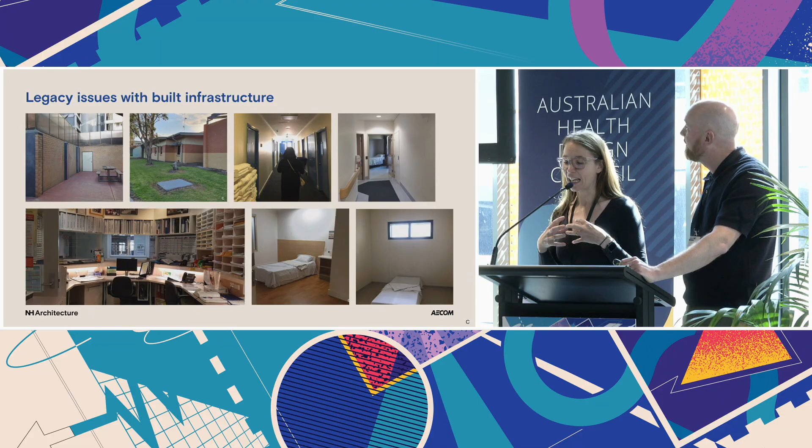Absolutely. So this is going to be quite awkward, isn't it? We'll work through this. We'll dance.

So the project itself was the first of future waves, and it was originally going to be the first urban wave with one regional hospital. So it was Royal Melbourne Hospital in the city, Northern Hospital in Epping, Sunshine Hospital in Sunshine, and the McKellar Centre in Geelong for Barwon Health. And really, this was the first wave of getting those immediate beds that were needed for the largest populations.

But as Codey talked about, what we were most interested in was firstly distilling down the key focuses for that work within the workshopping we did, which was obviously that it needed to be co-designed alongside people with lived experience. It needed to destigmatise the idea of mental health services, both in where the buildings would be sited, how they'd be positioned, how they could be perceived and what they were built out of. There needed to be good access to light. These needed to be spaces that weren't institutionalised. They need to be incredibly spatially legible and, of course, familiar and domestic. And when we started this, we didn't know what we meant by that.

And I always struggle to talk about how profoundly, personally life-changing this project was, and I don't know, Nick, if you felt it too. But designing really extensively as a co-design service with over 300 individual stakeholders week in, week out over a really long program, it changed the way we practice. We had to be really diligent about genuinely co-designing. We had to change the way that we demonstrated that feedback was taken on board and listened to, and we had to think really carefully about our language and how to be inclusive in what could be a really trauma-filled experience for people who had a lived experience of mental health, in a design process where we're talking about a really wide range of both really positive issues that we can influence and things that need to be considered from health and safety perspectives. So it was a challenging but thoroughly rewarding experience.

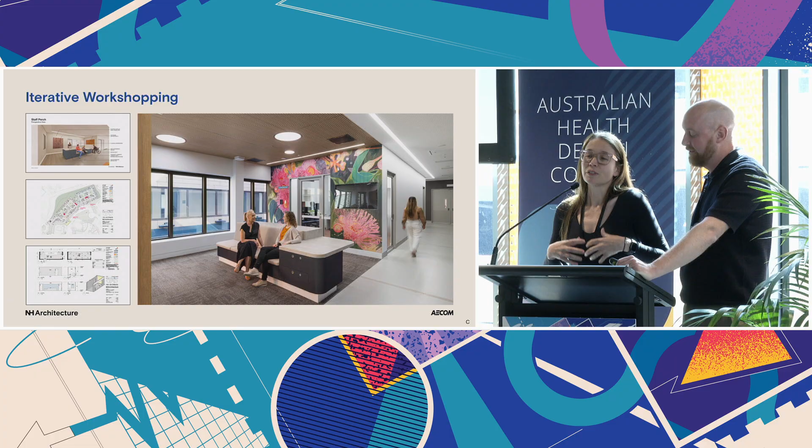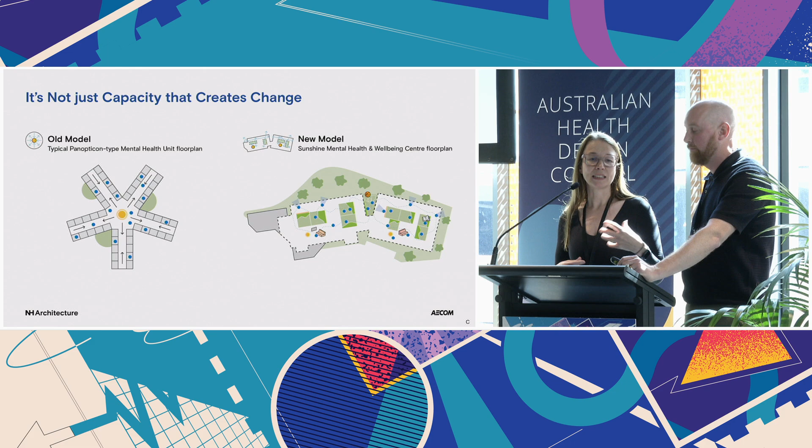We used iterative workshopping, which is not unusual, but perhaps slightly different in the way we had to frame it and capture it. We had to demonstrate improvement, and how it changed what we did from a panopticon model to something that was much more permissible and flexible and really did meet the needs across a range of stakeholders. We did prototyping, real life: come and feel the space, fill in surveys for us, collect it, touch it, feel it.

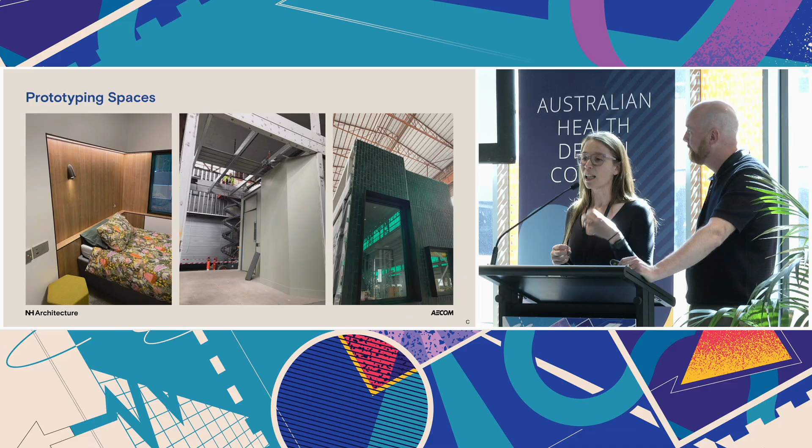I'll speak back to this slide in due course because we used modern methods of construction and standardisation, so this really gave us an opportunity to test elements before we rolled it out across many sites, many times. And of course, building projections so that people could walk around and understand the building.

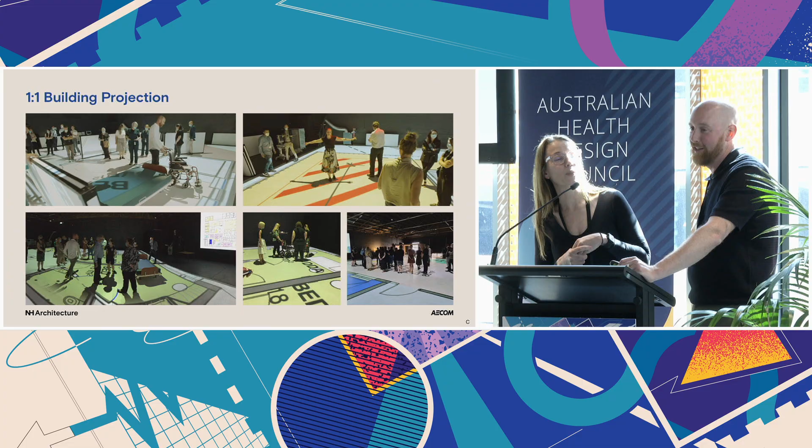I think we did this in the height of summer, Nick. I think 40 degrees or something. We spent almost a week there with close to 300 people, and it was pretty extensive. Although my favourite experience is we were there and we'd say, all right, everybody, get in the lift with us. And everybody, even though there's no walls, no anything, they'd cram into the lift and the floor would magically take us up to level 3 and we'd be able to look out and understand how the building worked.

And one of the great things about that, sort of the idea of being in all this process, was that the design outcomes are incredibly integrated. So you can't pinpoint a single thing. You walk into a space like this image here, and there's many elements that come together to make what the space is. There's the views through the courtyard, through the bedrooms, or the view out.

There's the way the service is being done across the desks. There's the way that the lounge system's working next to an ADL kitchen. These are all things that came through many conversations that made the space the way that it is now, rather than a single person with a pen on a paper trying to work it out.

We started to think about what is design familiarity and safety. What does that mean to people? What is welcoming? We still need to meet the health standards, we still need to meet the anti-ligature, we still need to meet the robustness. So how do you start to put those in a box and say those are secure things we need to do? But how do you then start to change the paradigm?

Is it about the timber? Is it about a view? Is it about the way that artwork is integrated? Those kind of elements were the conversations we could have. Equally, it's like, how do you see your 24-hour day existing? Yes, you're there for healthcare, but you're also there to recuperate. So what will you do with your time?

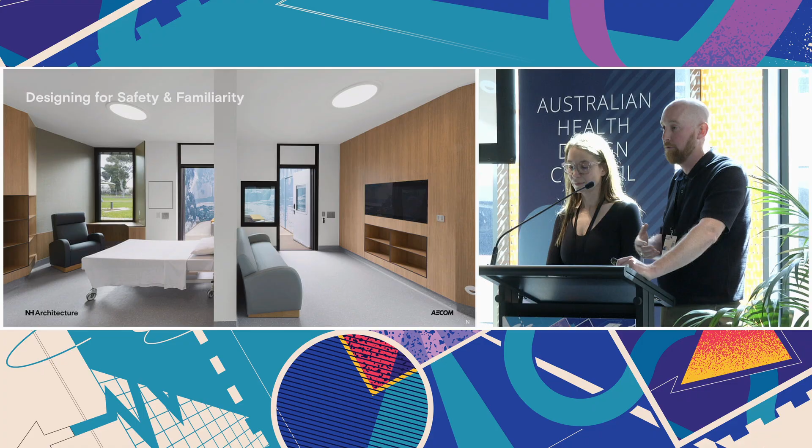Do you want to sit in a window? Do you want to have a view out? Would you like to have a space that's separate from the bed? Do you want to make sure you can't see your bathroom? Those are the questions and things we were discussing.

Equally, we were talking about, how is it to receive care? Is it to get rid of the us and them from consumer and clinicians? The idea that coming together around a desk on either side, you still have all the things you need from both parties, but you're actually working together on the problem.

It's something we brought up, these collaboration hubs, and I went just recently to Sunshine Hospital and saw them in action. It makes me so happy. I called my wife on the phone and said, this is the best thing we've ever done.

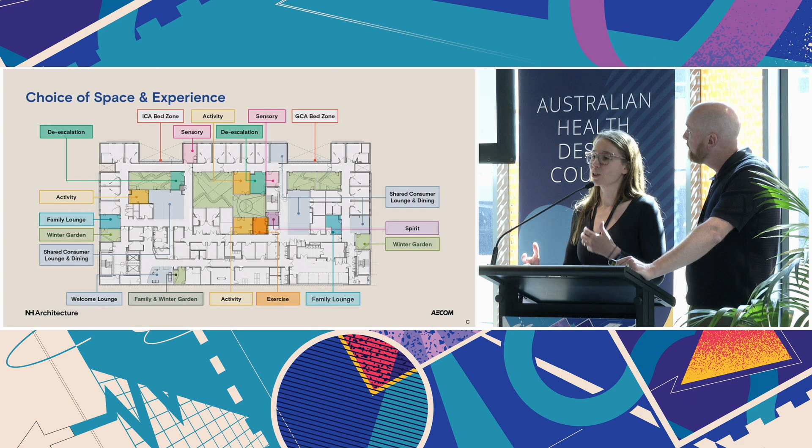And look, there's a huge amount of choice in these buildings, and I think what's really interesting is these were developed out of extensive co-design conversations, and it was really about a building that needed to be all things to all people, right? It wasn't acceptable for it to be enough for the majority. It needed to try and do a lot of different elements, and in my mind, it almost became a bit of a TARDIS.

We'll talk about it in a minute because I think that we need to think a little bit critically about what we did and whether or not it was required and how far we actually moved from a base case which was so underperforming to a case that potentially overperforms in some areas, and sort of that almost snap back of a rubber band in terms of how spaces are utilised and how people are now actually using the building and what we might think differently in future facilities.

Yeah, we'll get to that bit quite quickly, but I think it's important to remember one of the key things, along with having all the different bits of spaces, what was most important is that nearly all spaces need to be connected to the environment. And there's obviously environment as in the sky, the outside, but it's also more things like where you came from, how you got into a building, how you got there, where you're in relation to your home, where's the car park, where's the things.

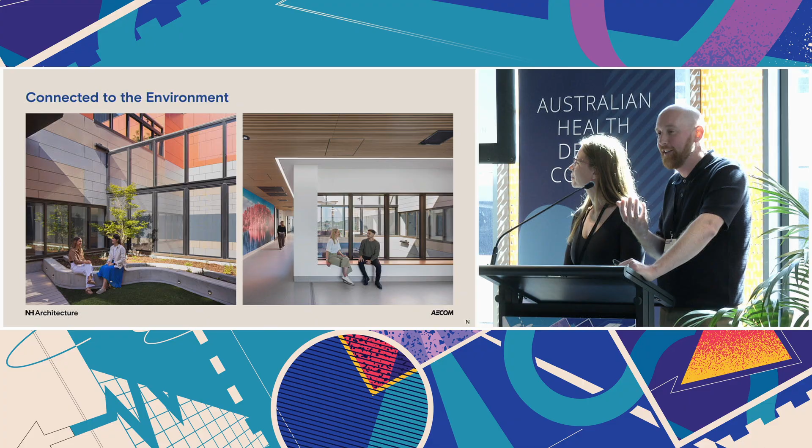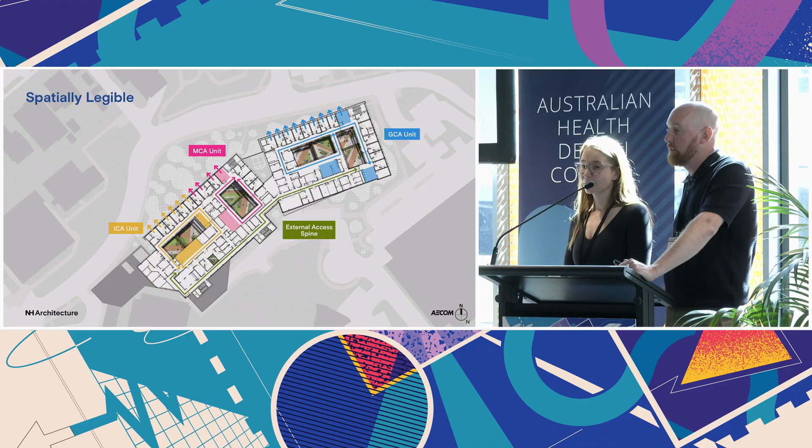The idea about really understanding being fully connected, not being institutionalised inside a giant TARDIS, actually, that was really important. And that really became about this idea around being spatially legible. So legibility extends past the idea of just understanding where you are in a building, which was important, but it's also understanding how did I get to where I am? What level am I? Where is my bedroom in relation to where I am right now? What's my journey look like through the day through this place?

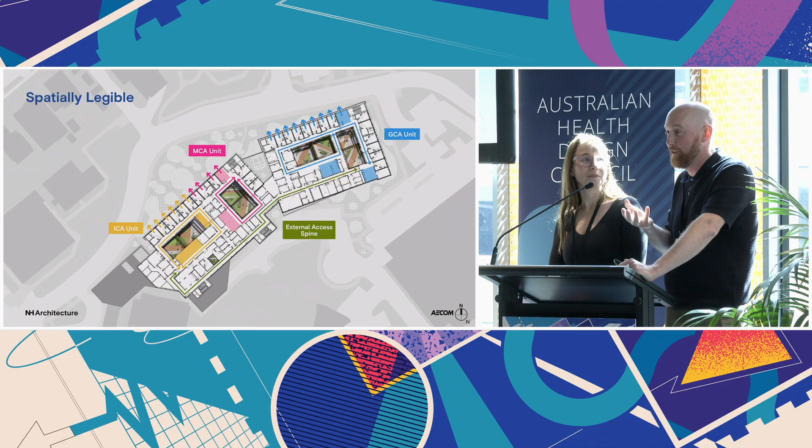And that became really important to how we actually understood the buildings, but also how we destigmatised them as large institutional health architecture. The idea that from your bedroom you can see everyone parking the cars in Epping Plaza all day and watching them play Skittles with each other is kind of fun and also very grounding.

And what came out as a result of that was the idea that the buildings really became building as boundary, which actually had another great benefit, was both that they became these buildings that just looked like part of the fabric of a campus. There wasn't large fencing around them. There wasn't the idea of institutionalisation of that.

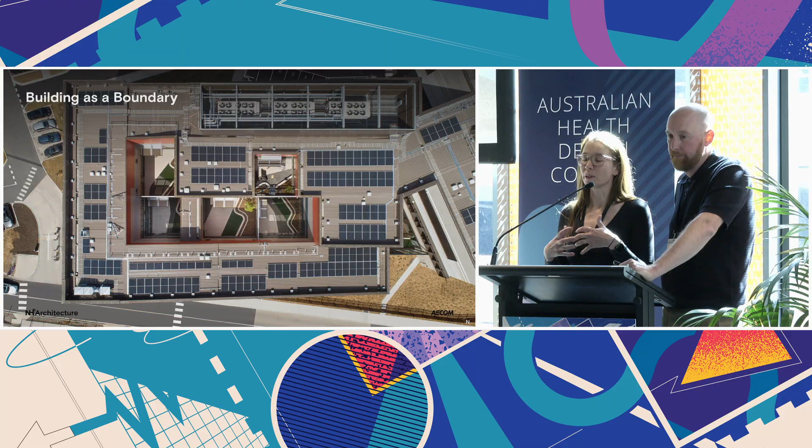Equally, within the building, there was very little need for many containment boundaries that were visible, because in a sense they became about a tall balustrade to an outside courtyard rather than the idea of a security device. And it really supported that co-design process where people had said one of the things that was just such a negative experience is fences and that sense of being contained.

One of the challenges of design for that is, as you might imagine, that when you start thinking about that, you've got to look at the solar access, you've got to make sure that all the courtyards have equal amenity. We're doing vertical buildings here, so then you start to have this problem. You carve away your building. Effectively, you're putting the consumer at the heart. So the spaces they occupy, the courtyards, the kitchens, the dining rooms, and the bedrooms become the heart, and you have to plan everything around that. And the challenge being you end up with more space at the bottom than the top.

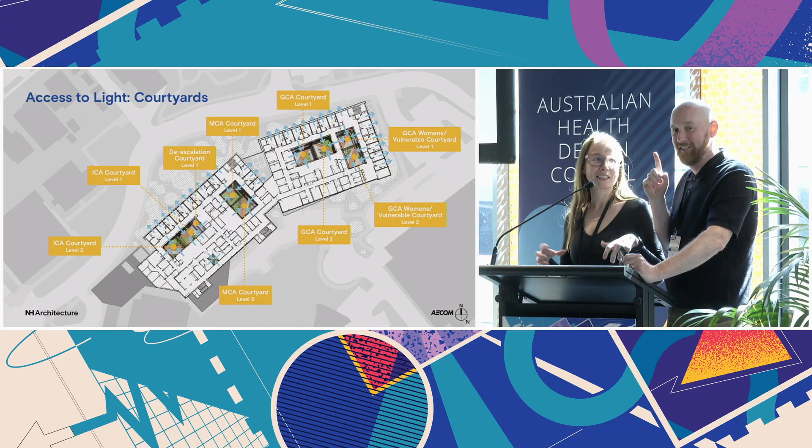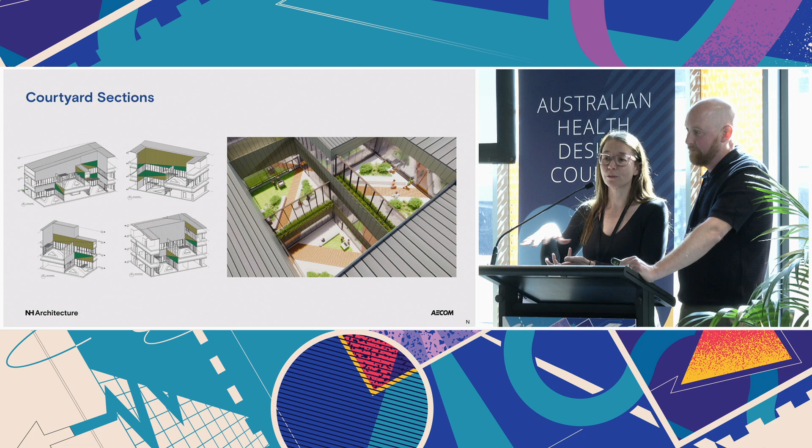So as Nick's Swiss cheesing his building to get solar access and high amenity to ground floor courtyards, we really had to think about how you're standardising it. And you had to actually think really carefully and critically about how your building worked as an organism across different floors. So it no longer became about repeating and standardising as just doing the same thing on every level. The building had to work really hard, and you had to think about sharing spaces and making sure that people could move around the building with as much freedom as possible.

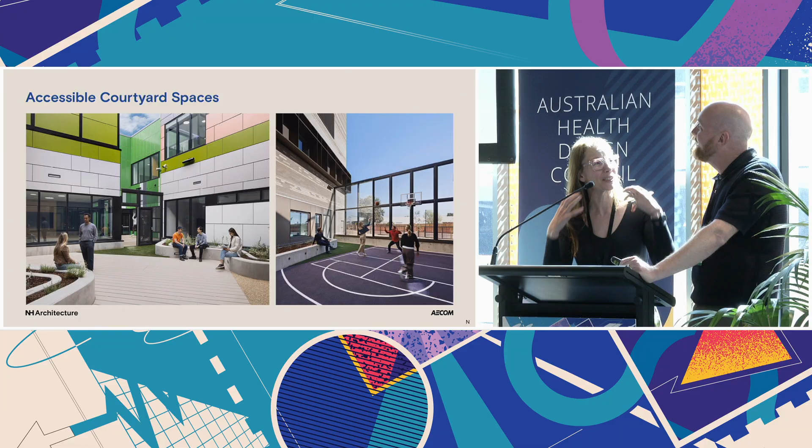I don't know how much we fought basketballs the whole way through. We're like ping pong, table tennis, badminton, just about anything other than basketballs, but we just could not solve it. It was basketballs, wasn't it? And they're the most used spaces now. They're these great spaces that really normalise the care. But if anything's going to drive you mad, it's a basketball bouncing when you want to rest.

So I guess from a design team perspective, continual learning and us going back and having a look at how buildings function after the fact, from how we design to what's happening. And there were some real success stories in the design.

And for me, one of those particular ones was the staff hubs acting as these anchors without barriers within the care environment. So staff had a place to come back to and to sit at. It was flexible. There were different ways to work at that space, but it was really embedded in the care environment so that consumers didn't have to go looking for anyone. They had that anchor that they came back to.

And it does work a little bit like a Swiss Army knife. If you want to work across it like a desk, if you want to sit side by side, or you want to sit in a more casual environment, this furniture really became an occupiable space that really adapts to what people want to do in terms of the conversation. You can have a more private conversation, or you can have a more transactive conversation. So that's been really fascinating.

Little things like creating that ADL kitchen as open and just integrating it. It needs less space, but it becomes part of their normal environment.

If somebody's sitting around looking a bit quiet, there off you go. Make yourself some eggs on toast or do something, at which point it becomes less of an assessment and more a normal practice of day-to-day life. The de-escalation courtyards, the sensory rooms and the courtyard use are just, it's extraordinary how much people use these spaces to manage their behaviour and therefore reduce that seclusion practice.

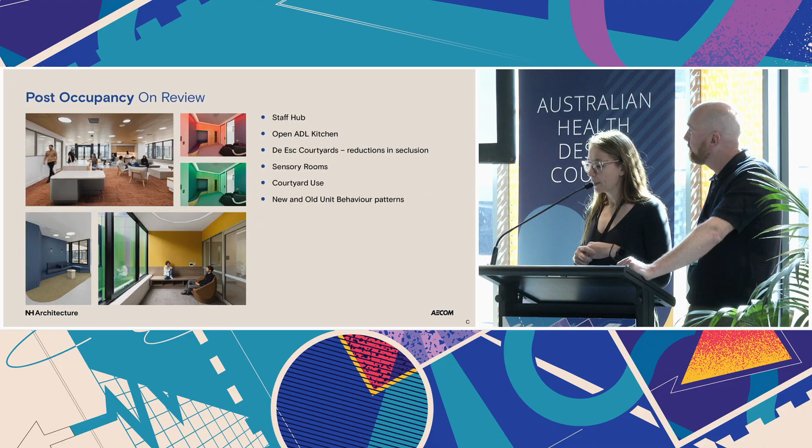Perhaps more critically, though, I think we've come back to thinking about how things work differently. And if I had my time again, I think I would understand a lot more about how space is used and the sort of response that large co-design groups have to an existing environment. I think it's something that we all are challenged by in a design process. A lot of times people are like, do you know what, we need what we have, but just more of it. And this project was about changing the way we use space rather than just giving more of it.

But if I was really critical, one of the things that came out of our project was a really high diversity of spaces, particularly quiet spaces and quiet lounges, little nooks, places that people could go to have a little bit of solitude but not be in their room. And I don't think people use them as much as we anticipated they would. On reflection, it's because the rooms they were coming from were so limited in their amenity, the outlook was so controlled, they were often shared environments, that the feedback was we need something different to this.

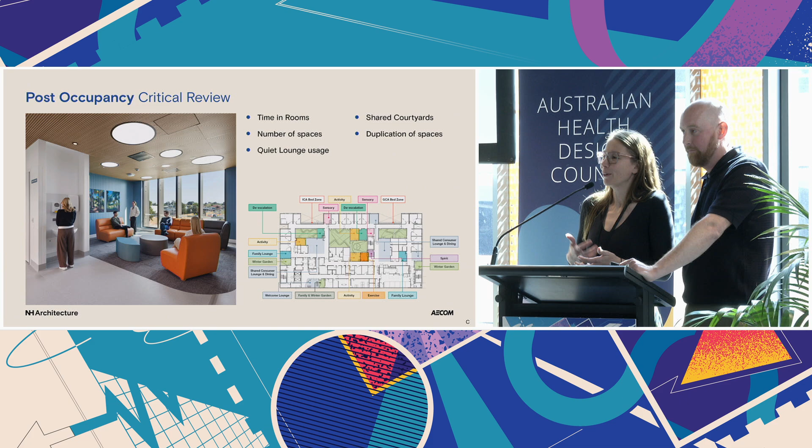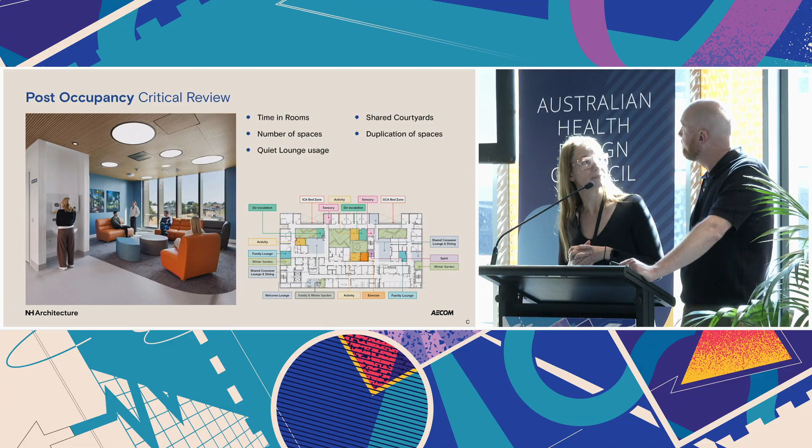Whereas in these buildings where the bedrooms have large windows, they've got a comfy couch, a bed, a desk, people are tending to stay within their own privacy. Whether that's good or bad needs that intersection of therapeutic and architecture to come together to say, do we need to get them out of the bedroom? But I will say that those spaces aren't used, and they should be more interrogated going forward.

Would you want to start on this one? Do you know what? I will start on this one. This is one I could spend an entire conversation on.

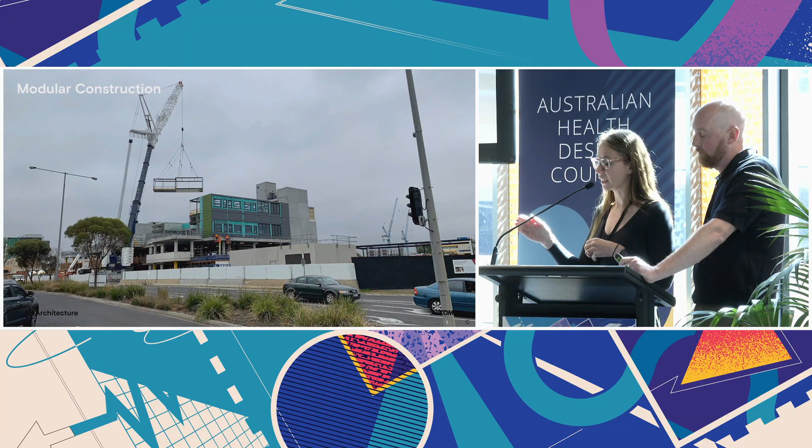Let's start. These projects also embraced the idea of standardisation and modern methods of construction. So there's a bedroom module, there's an ensuite module, there are really clear and strong design principles that work across all of the projects, with the exception of, we'll talk about it in a minute. But they are designed to be done with off-site construction. So we worked really hard across 3 of the projects to do a whole standardisation of the design to make sure these facilities could be constructed off-site. We spent an awful lot of time on it.

However, when design met market capability and capacity, we ended up with 3 different modular contractors. Every single one of them had a different design. Every single one had to be bespoke. We had to change details. We had to work even more to make it standardised. So it was a really interesting conversation in terms of how design standardisation needs to meet market maturity and capability, how that needs to happen going forward, and what we need to do to invest in benefiting from standardisation. I think there's a lot of lessons learned.

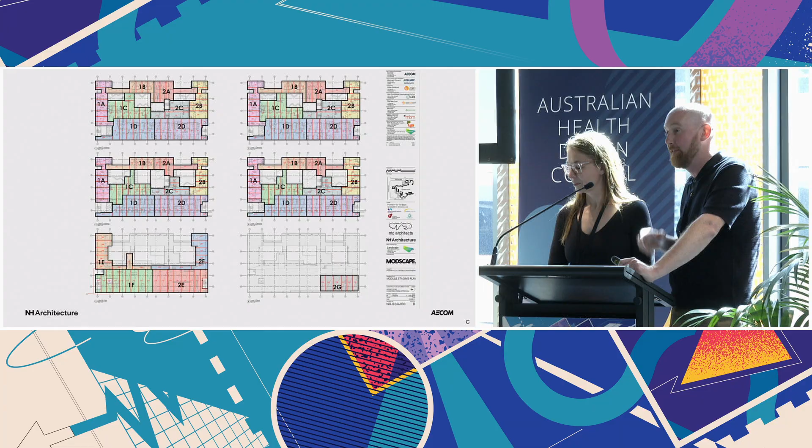The way I describe it is, imagine that every EV company brought out a car with a different plug. That's kind of what it is. We design the function that we want, but in actual fact we need to redesign it once you award the contractor, because they'll have a totally different system, and you currently need to go back to Australian standards and get a deemed to satisfy. This was for a project that needed to be delivered in 3 years from master plan to occupation. These were big challenges to get through at pace. And they were done, and I feel like the whole staff have worn the scars of doing that. But it's certainly something that can grow from here.

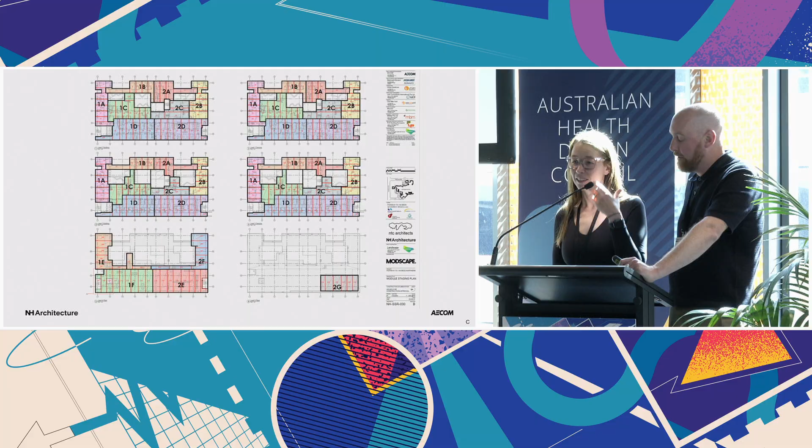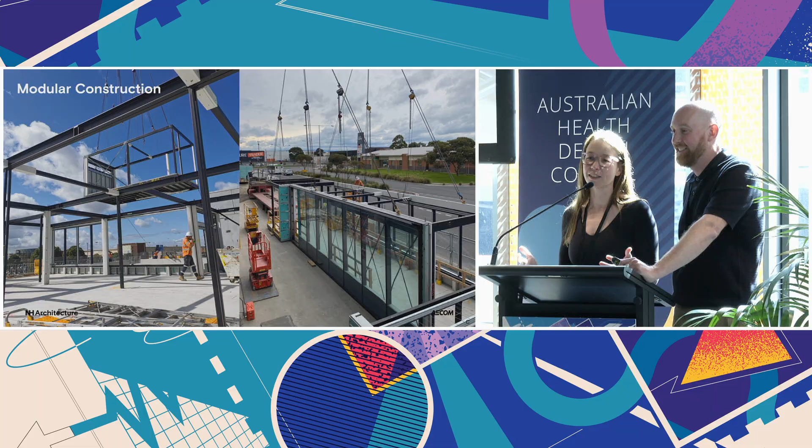I was going to say, it doesn't matter how much you standardise windows and details and modules, if the market can't meet it, that needs to be factored in really early so that we can manage it. And we actually ended up having a full range, from completely fitted out modules arriving to site, to some that were just chassis. So it was a really interesting juncture of MMC versus design and intent.

But it's interesting. There are some things when you start to go back to the idea about destigmatisation and the idea about these being architecture that responded to people feeling like they were being cared for. One of the things we found across all of them across the world was that the buildings had their facades and things put on site. Because modularisation is still currently seen as a step down from a building that feels permanent. And that's something we need to work through too, because it shouldn't, but it does at the moment.

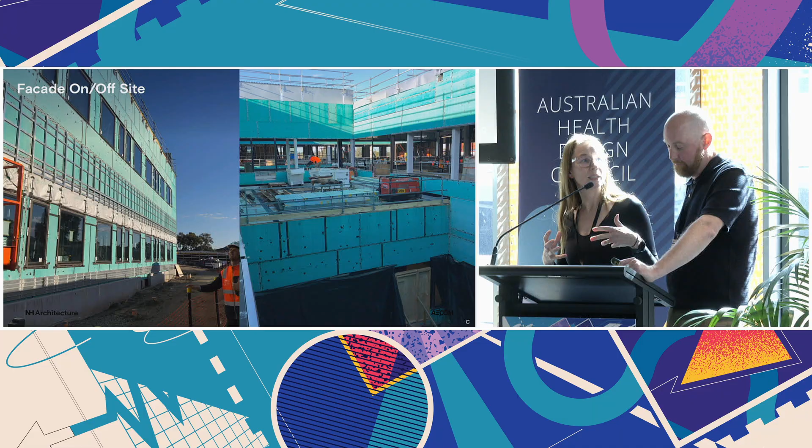So we heard loud and clear these buildings need to feel like they were invested in at equal weighting to anything else on a hospital campus. And that was really interesting. And it did change co-design too, because we had to run sessions which were overarching while still allowing sessions for placemaking and space so that the buildings didn't all feel exactly the same. And I think you're going to show now that even though there's a lot of DNA that's shared across the project, they ended up being very different.

Yeah, and I think what we're trying to say here is have the cake and eat it too. One of the things we have reflected on is that they all have the same bedrooms, the same facilities, the same square meterage per person for each of the facilities. They are standardised projects. However, they're all designed for place, with stakeholders who are from that place, both clinicians and staff, and lived experience who have been treated in that place by that hospital.

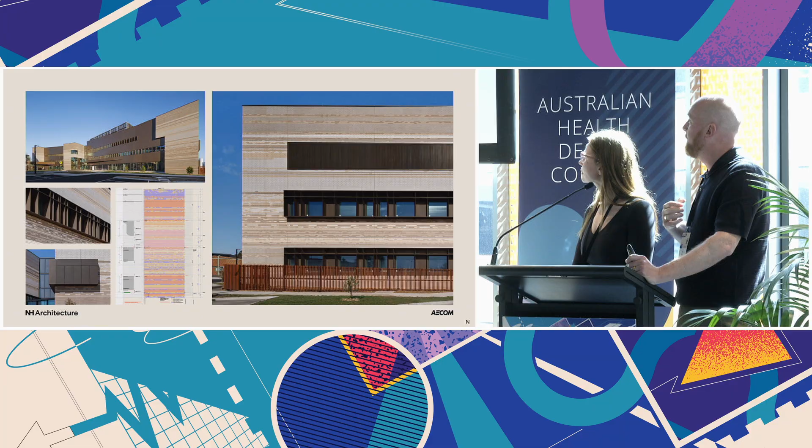So when you start talking about Sunshine Hospital, which is actually the biggest of the facilities, they really wanted to bring together a whole suite of their existing facilities and this, and they made the Centre for Wellbeing out of it. It is about being in the Sunshine Plains. It's in the west. We did this whole idea about the brick patterning, talking about their horizon and the way they see the Great Plains out to the west. It was also aspirationally around the idea of going to a hotel. The way hotels express their windows, that form was something we took on board from that workshopping and brought through into place, and it has a big garden to the north.

And when you're in the Epping Plaza, the biggest place in the north for shopping, you look across, and I can see the red light getting there, you can see people move around the building. It's quite normalised.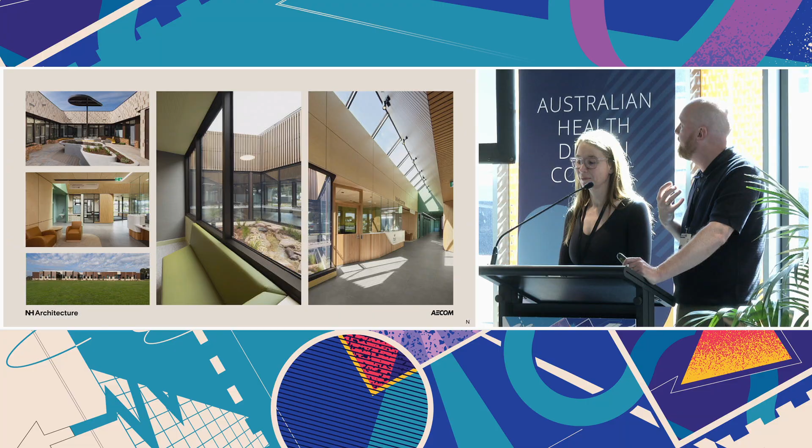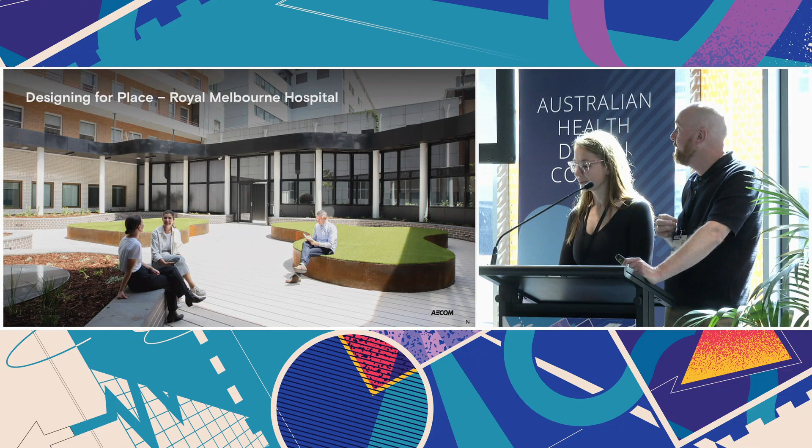Barwon Health is much more about building a small village, bringing the homeliness and the touch and feel of a place that is actually for occupation and housing into the building. And of course, RMH was a whole different challenge. It was as brownfield as it comes. We cleared out all of level 1 to put in a large outdoor courtyard on top of the existing library, complete with skylights back through our landscape. We could find a space in such a gnarly campus. The same principles that apply for Sunshine need to apply here. And we're really proud of it because even though it's not modular, it has the same stylisation and the same facilities within an existing building.

And do you know what? In the break, ask me about the art that we put in. There was an entire art program dedicated to these projects that really changed the look and feel of these buildings and how consumers felt around them. And I have to say, they fill my heart with happiness when I see these images. And there's a coffee table book, and we're really happy to share it with you if it grabs your attention.

But perhaps just in the last few seconds, I'd like to reflect again on the journey that I've been on and that Nick's been on and our design teams have been on, and the enormous contribution and goodwill of people who participated in our project with lived experience, particularly those with lived experience of mental health and their families and carers. It was an extraordinary contribution, an extraordinary time commitment. And the projects would be very different if we hadn't had them as part of the process.